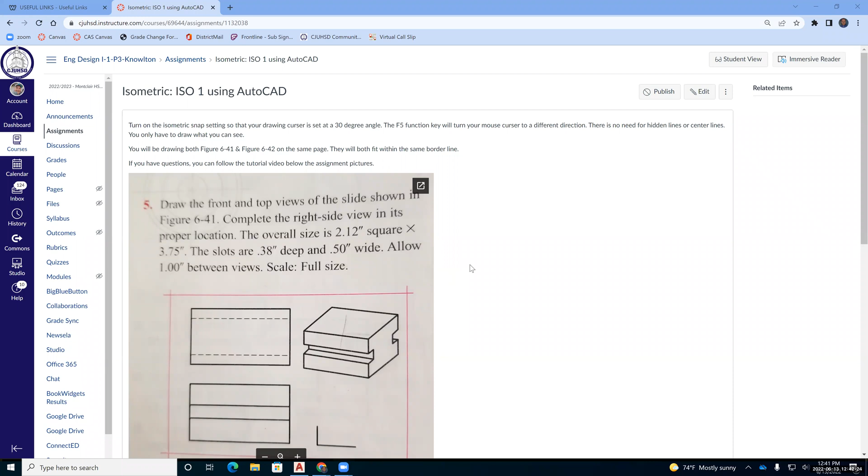Okay, so we are going to be drawing the isometric view of two different items. We're going to draw the isometric view of this object. It's going to look similar to this one right here. We are also going to draw the isometric view of this item. It's going to look very similar to this right here.

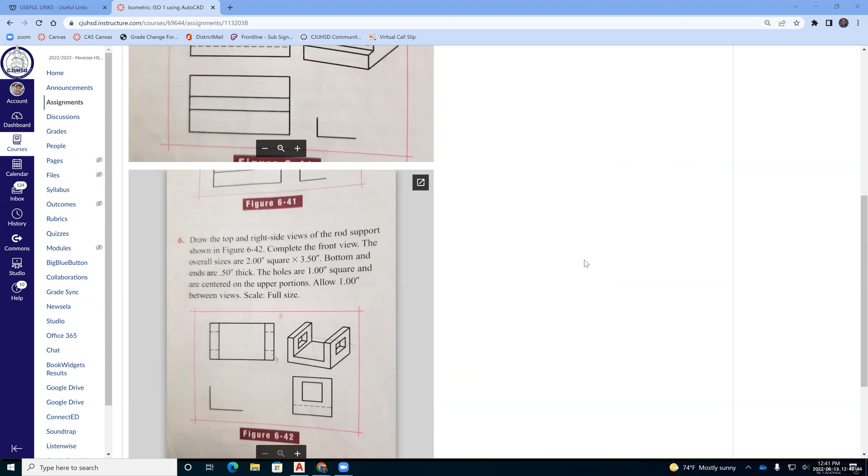Now we've already drawn the orthographic projection or the multi-view, right? The front, top, and right side view of both of these items. So now we're going to create the isometric view, the pictorial view of what this thing looks like. We're going to use the same measurements.

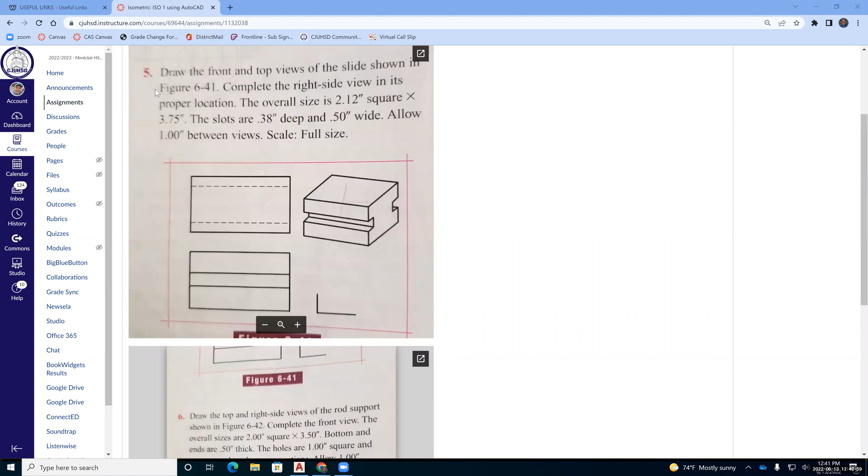So this thing, the first one is 2.12 inches square. Vertically 2.12, the width 2.12, and the length, this length is 3.75. So it also says that these slots here are 0.38 inches deep. That's how far they dig into the item. And they're 0.5 wide, meaning up and down, they're 0.5 wide. So we can take that information and we can draw the isometric view.

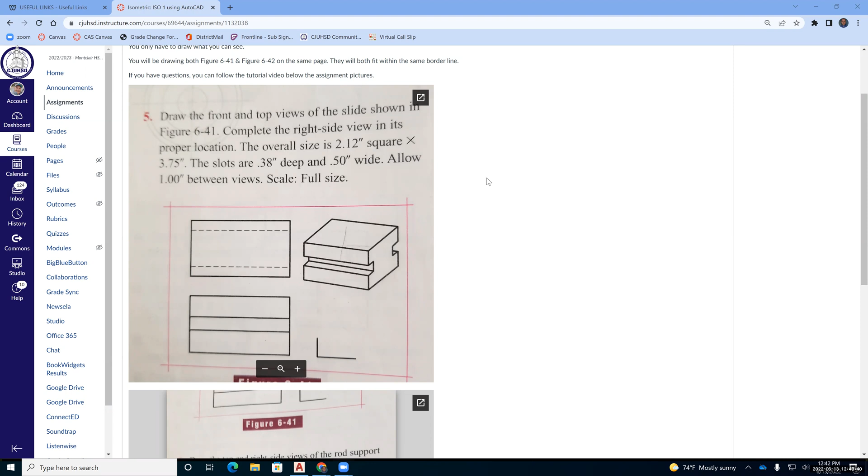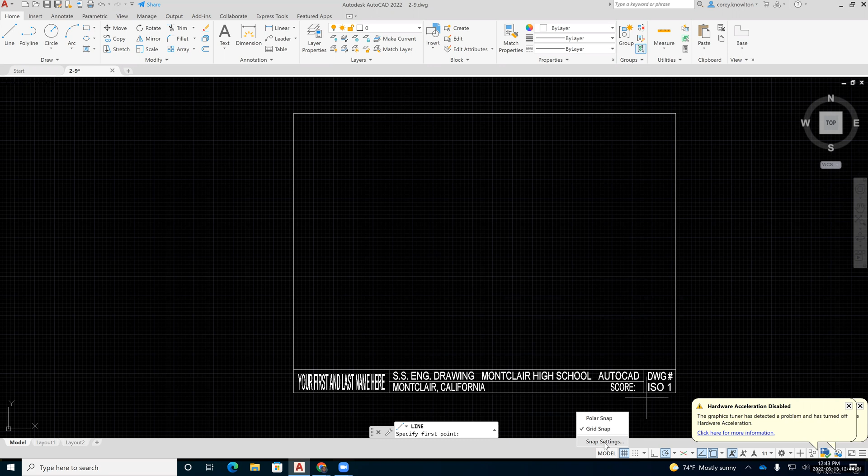So let me convert over to AutoCAD here. And we're going to draw this thing. So I am going to get a line command. Oh, first of all, before we even start, we have to set up the isometric settings on this. So I'm going to go down here to my snap and grid. I'm going snap settings. So you click on the little pull down or pop-up menu, snap settings. And I am going to turn on isometric snap. So turn isometric snap on.

Okay. And I am going to start here by drawing from my isometric axis, right down at the bottom of the page. I'm going to draw, first of all, I'm going to make sure that, whoa.

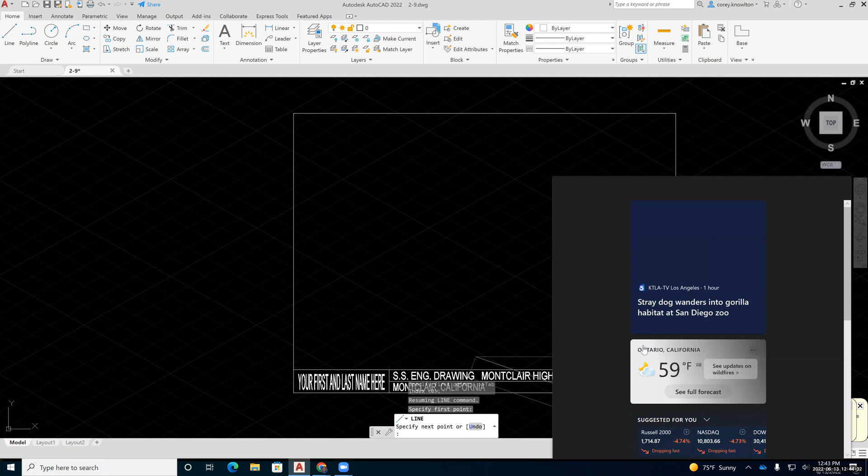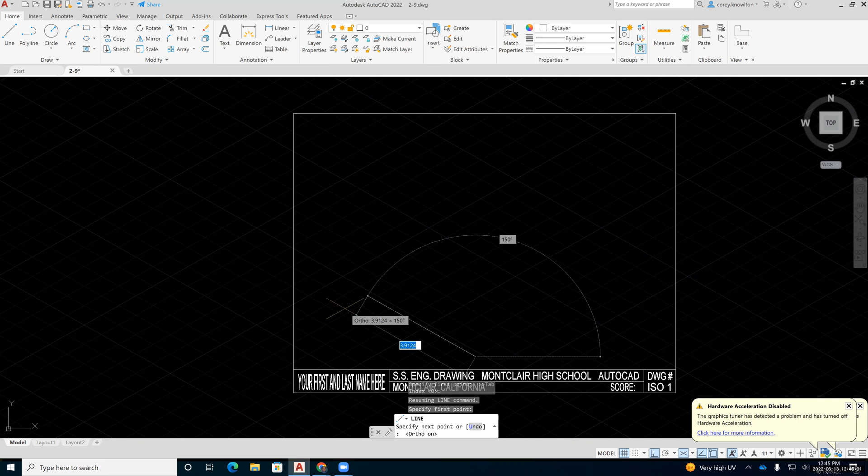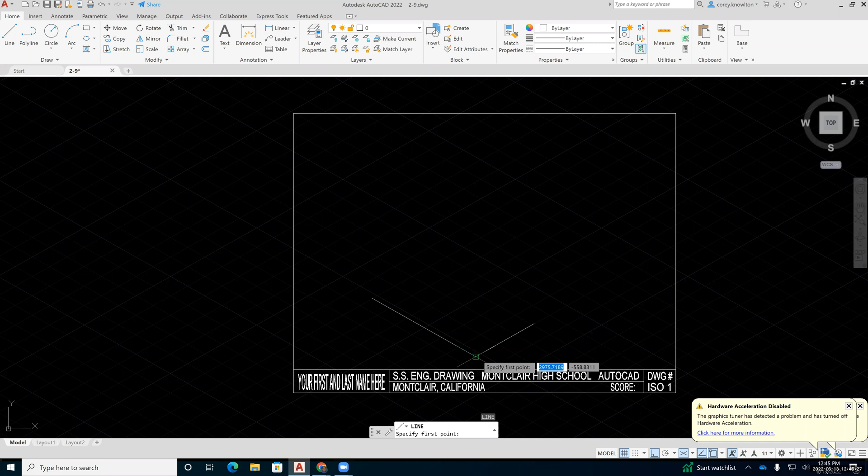I am going to turn on ortho to make sure that my 30 degrees are locked in. And I'm going to recheck the size of my object. 3.75 long, 2.12 wide and tall. So I'm going 3.75 this direction. I'm going to go 2.12 inches this direction. And I'm going 2.12 inches vertical, but I have to hit the F5 function key in order to get vertical.

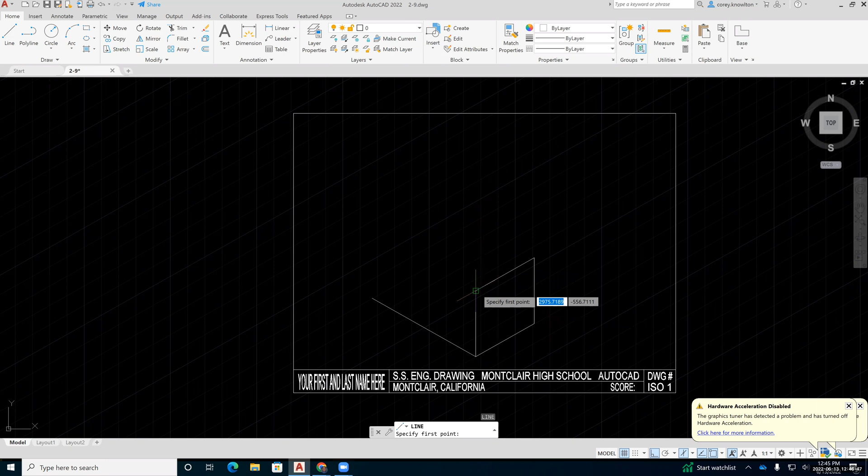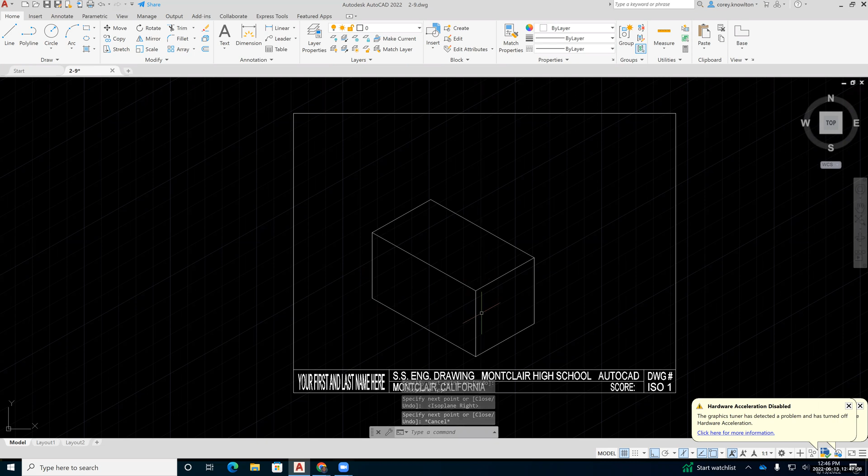So 2.12, enter. I'm going to go this direction, 2.12, enter, and back down, 2.12. I'm also going to go F5, and I'm going to go 3.75 this way, and 3.75 this way, F5 over to here, and F5 down to here. So here's the brick that I'm dealing with. Now I got to cut the slots out of this side and out of this side.

So it doesn't tell us how far to come up from the bottom. It just tells us that the depth of the slot is 0.38 and the width of the slot is 0.5. So I'm just going to draw a reference line just so I know where the middle is. Middle is here. And I know I've got to come half of a half, because the whole width of the slot is a half, or 0.5. So I'm going to draw a little reference from here.

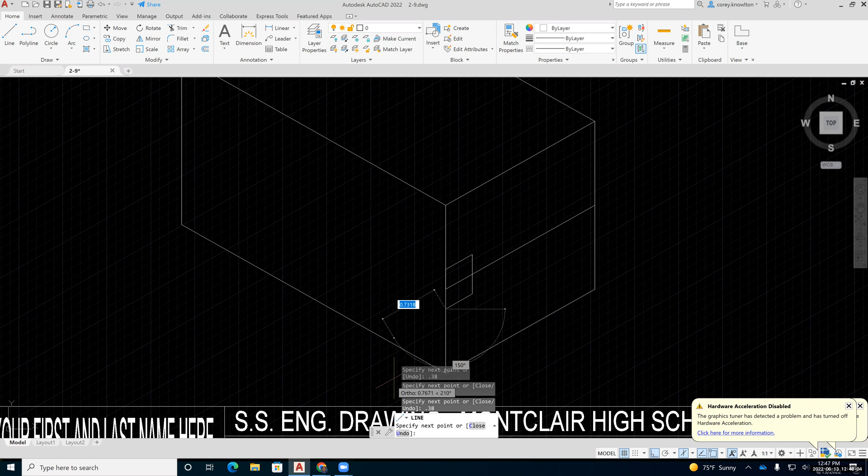I'm going to go up 0.25, enter. I'm going to go in 0.38, enter. Back down 0.5, enter. And back this way, 0.38, enter. So there's that little slot here. And I'm going to take these two corners, F5, 3.75, enter. And from here, 3.75, enter. And that's what that looks like.

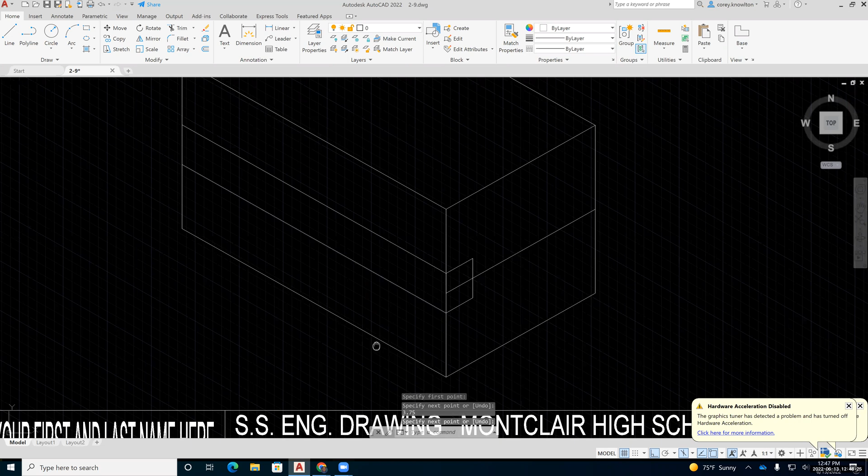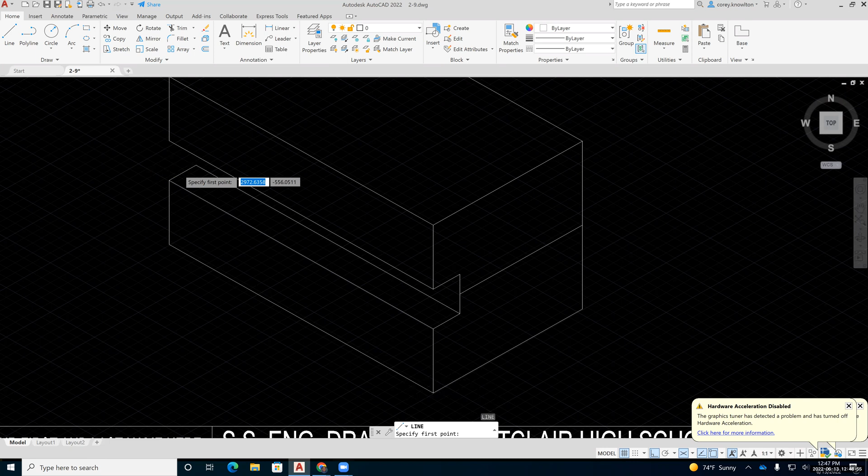Let me trim this up a little bit. Trim. Oops. Trim this. That's what this looks like. This inner slot, I'm going to draw the inside of this as well. This goes 3.75, enter. F5, and I should be able to take it right to here. There's a little piece that I can see right here. F5, I'm just going to draw it straight up and then trim.

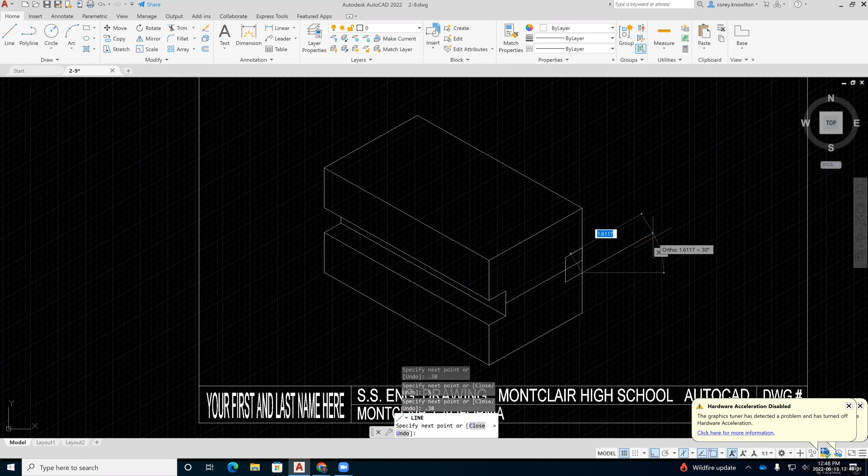Good. I'm going to do the same thing on this side. This side is not as detailed because I can only see a little bit of it. So I'm going to do the same thing though. I'm going to start here, go up 0.25, enter. This way 0.38, enter. Down 0.5, enter. And back 0.38, enter. Enter again. Let me trim.

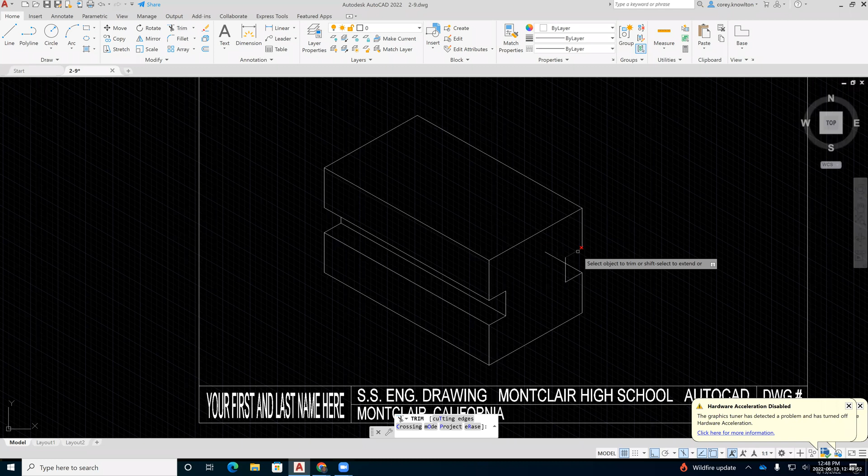Here's this middle piece. The last thing I need to do is draw this corner, F5, back this direction, and trim. So there is that first figure. So I'm going to highlight all of this and just kind of slide it over.

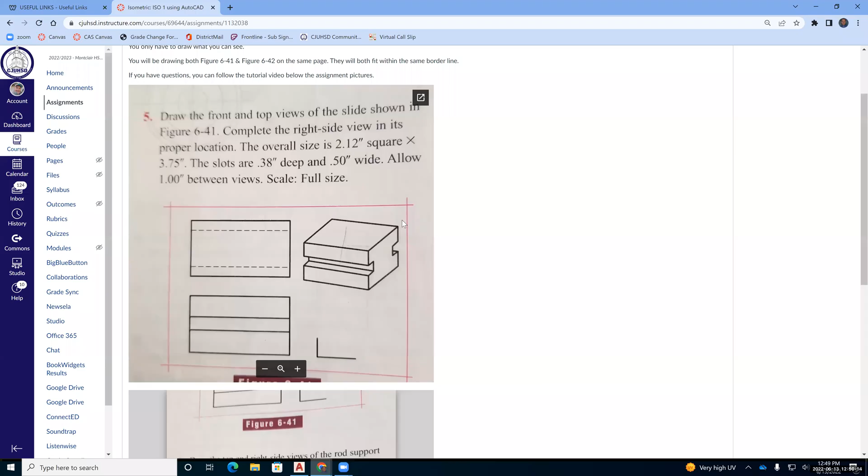Okay. Now I'm going to draw the second figure. That second figure is this one here. So it says that this one is 2 inches square, meaning the height is 2 inches, the width is 2 inches, and the length is 3.5. So the length is 3.5 this way. It says that the thickness of the material is 0.5. So we got 0.5 here all the way around. And the window, as it says, is a 1 inch square window, and it's centered on the top upper portion of this wall right here.

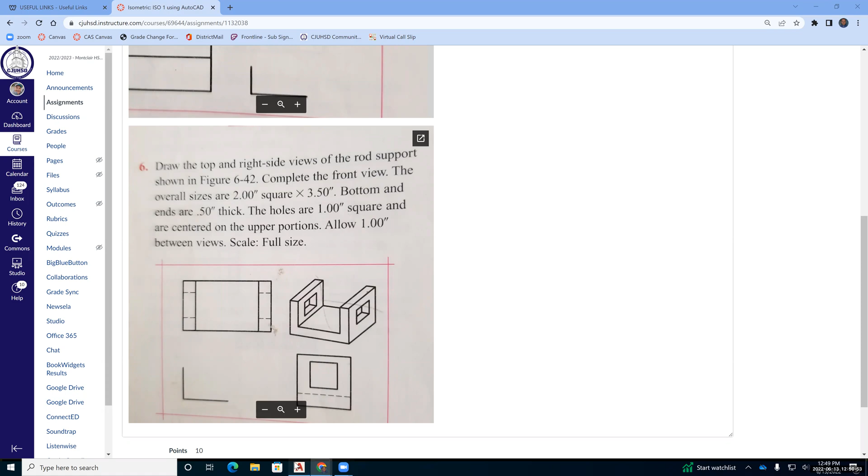So let's draw this. 2 inches by 3.5. I'm just gonna maybe start over here and then just move it back on so that we don't get in the way. So I'm gonna go a line from here. I'm going 3.5. I'm gonna go back to my isometric axis, my starting point, up 2, and F5. I'm going this way, 2. All right, so there's my isometric axis.

I'm going to go up 2 and back over this way. F5, I'm going 3.5 this way and back down 2. From here, I'm going 3.5, F5. So it looks very similar to the starting of this one, just a little bit different in the measurements. So I'm going to go from this top corner now over 0.5. And I'm going to go from this top corner down this way, 0.5. I know you can't see what I just did, so let me delete out this line just so you can see what I did. So I went in 0.5 and 0.5.

I'm going to take these two pieces this way 2 inches. And this way 2 inches. And from here, F5, I'm going to go down 1.5. From here, I'm going to go down 1.5. F5, and then I'm going to connect them. I'm going to get rid of this piece. I don't need this top piece anymore. And I am going to connect to show this wall. So I'm going to go 2 inches down,

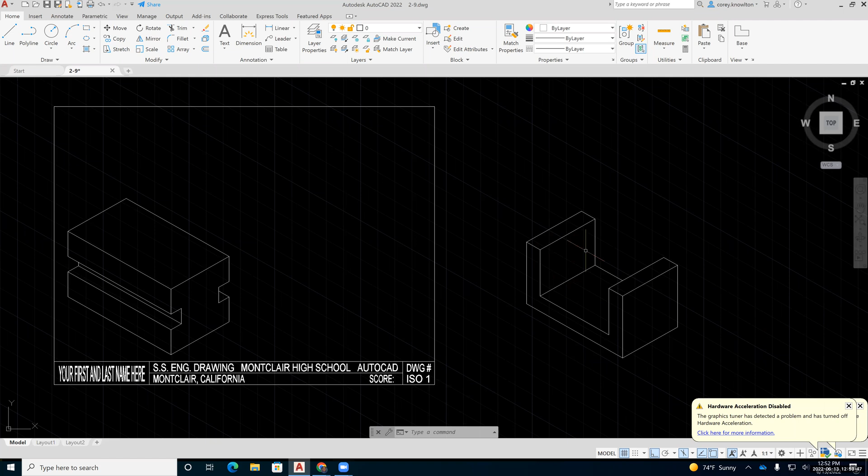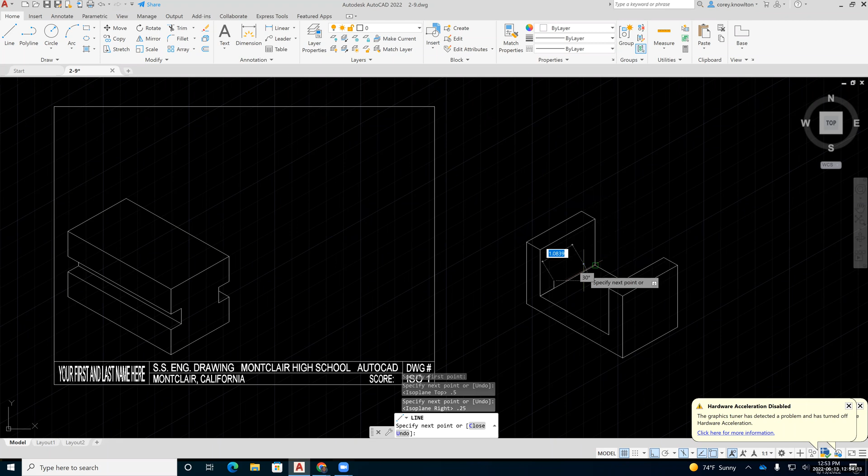So I've only got 1.5 here. If I'm going to center a 1 inch window in a 1.5 wall, that means I'm going to have 0.25 above and 0.25 below. It's a 1 inch window sideways also, but I've got 2 inches here. So that means I've got a 1/2 inch spacing on either side. So here's what I'm going to do. I'm going to go from this corner. I'm going to go to the right, 0.5, enter. F5, then I'm going to go vertical, 0.25, enter. So that line right there is going to be the bottom left corner of my window.

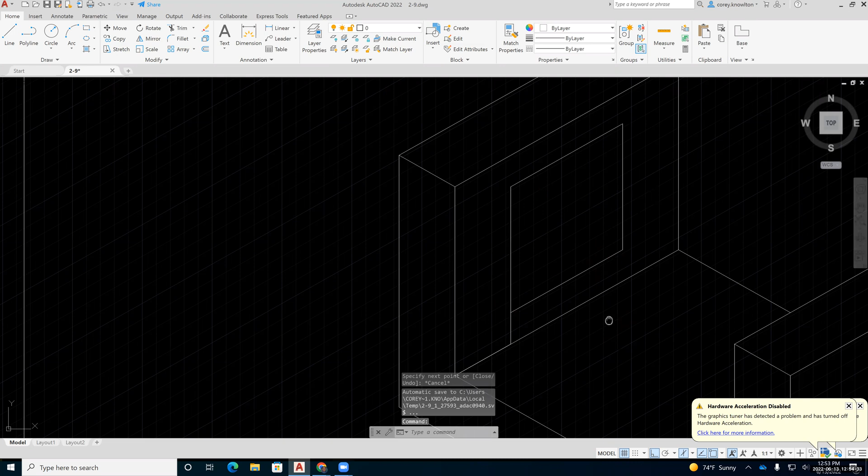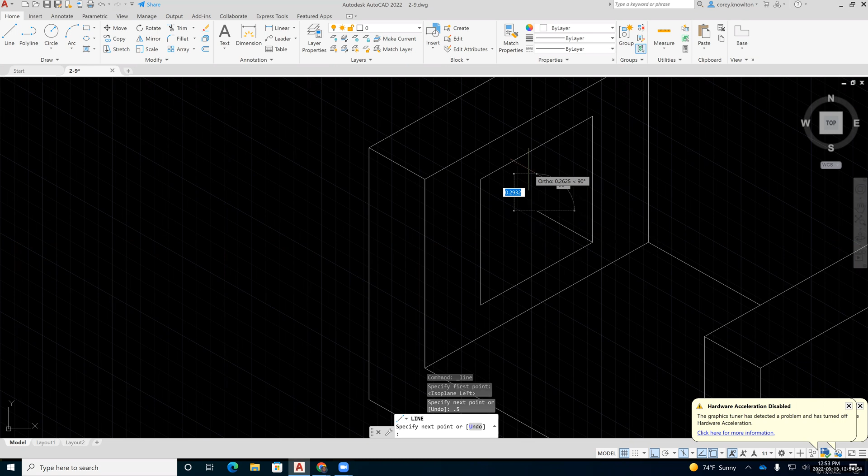Now my window is a 1 inch by 1 inch window. So I'm going to go 1 inch this way, 1 inch up, 1 inch back this way, and then 1 inch down. And then I'm going to get rid of the original reference lines. Now I need to show the inside of this window. So I'm going to go F5, and the thickness of this right here is 0.5. So I'm going to go from here in this way, 0.5, enter, and then straight up until it disappears. F5, straight this way till it disappears, and then trim. All right, there's one window.

I'm going to do the same thing over here. I'm going to go from this corner. I'm going to go over 0.5, enter. I'm going to go down 0.25, enter. That's going to be the corner of my window. So now it's a 1 inch by 1 inch by 1 inch by 1 inch window. Delete out my little reference lines. And I'll add in the same thing that I did here. I'll add it in here too.

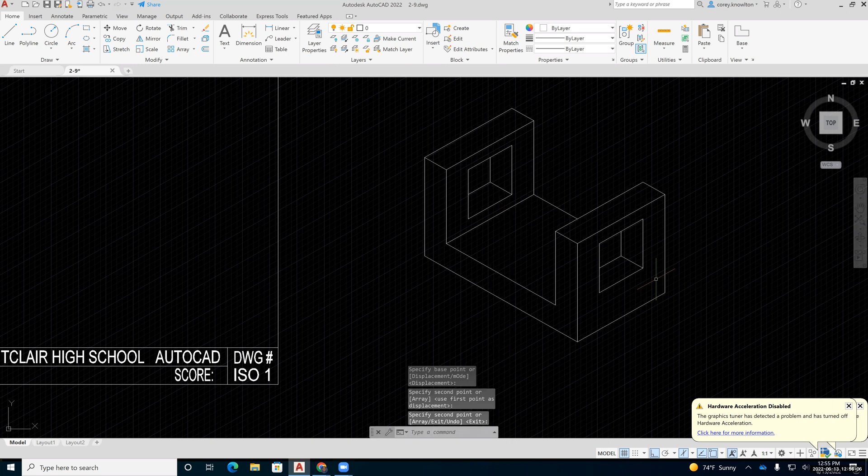So you can either draw it or you can go copy these 3 lines, enter, grab it at this corner and drop it on this corner. I know that was fast, but I think we did it. Highlight the whole thing, grab one of the lines. Don't grab the handle, but grab a line and then drop it off inside here. Here's our 2 items, and this would be isometric 1, or ISO 1 is the name of this drawing. Hopefully that's helpful.